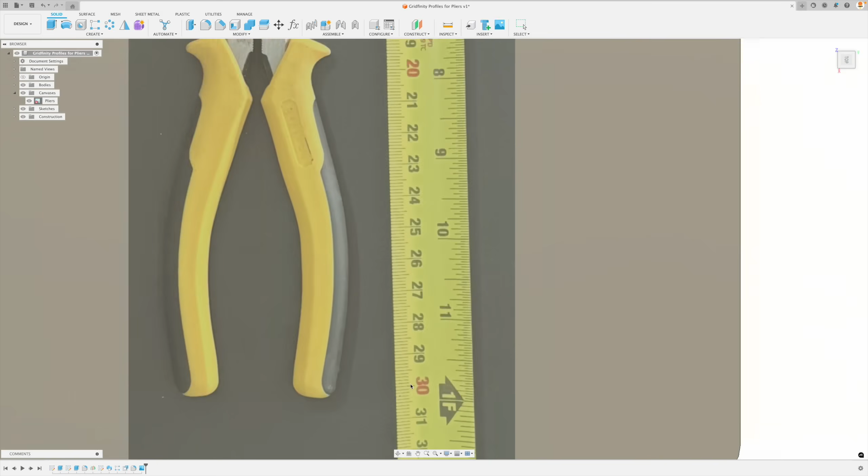In this tutorial, you will import the Gridfinity profile that we just created and use it to create a custom holder for a pair of pliers. To do this, you will import, orient, and scale a canvas image, sketch the profile using splines, and then extrude to finish it off.

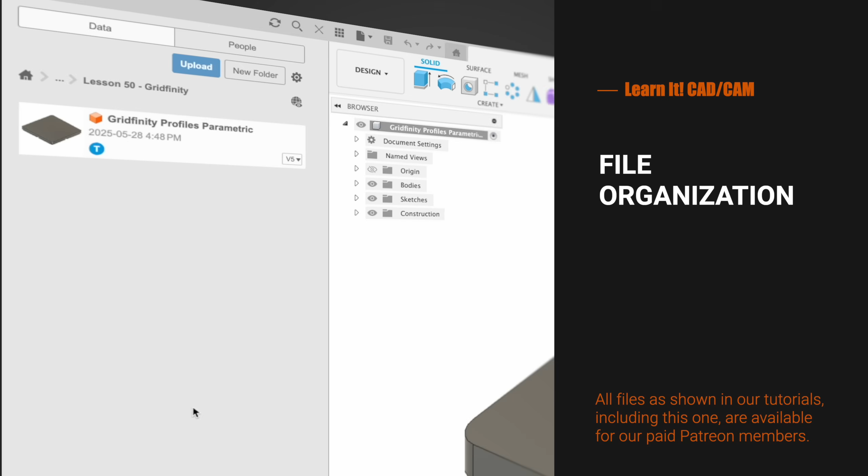The first thing we're going to do is organize some things. You can see that our Gridfinity profile's parametric design file is already inputted. This is the master file, so we don't want to use this directly; we want to create other files based off of it. So we'll just copy it, paste it in the exact same location, then right click and rename it as our plier design.

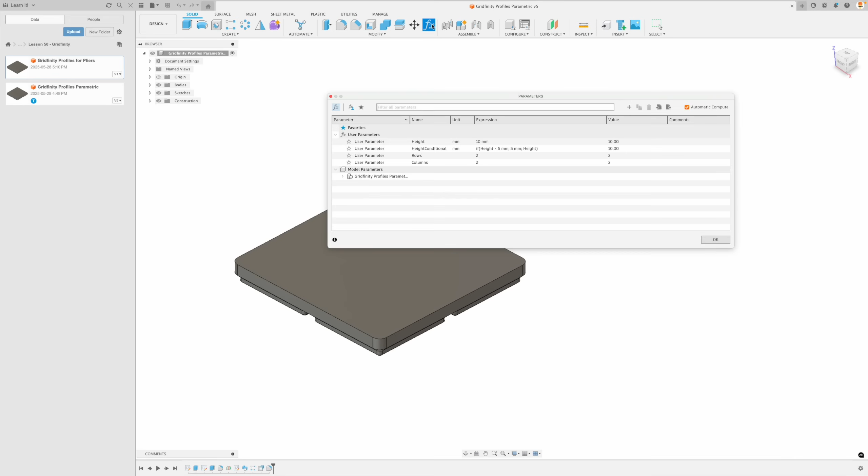Our original file is up on the screen right now, and just to show you, we can change the number of rows and we can change the number of columns very easily. If you'd like to learn how to make this, you can head over to the tutorial we just produced, and for our Patreon members, you can download this file for free.

So let's just go OK. We can hide this file and make sure to bring up our pliers file instead. Now what we're going to do is import a canvas image.

We're going to have a bunch of different custom designs for each tool in our toolbox, so I'd like to create a new folder to host all of our canvas images. I'll just call it our canvas images folder, and then within that, we're going to go to our file and upload the pliers image.

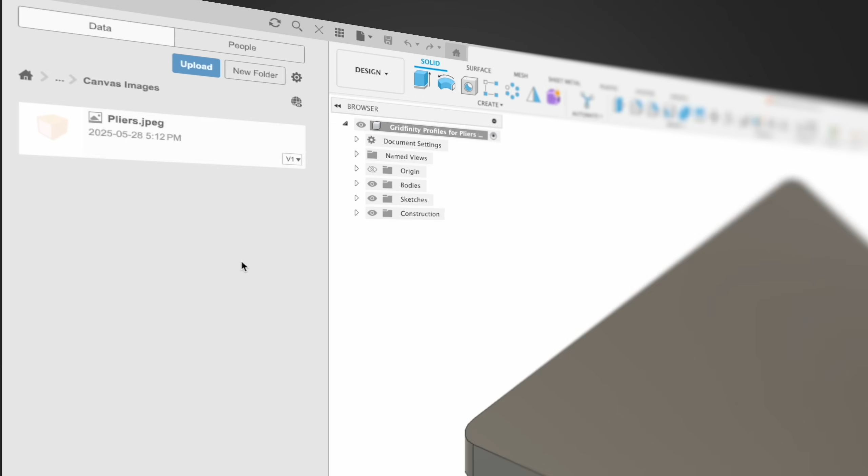This can be anything that you've taken a picture of. Once the file is uploaded, there we see it in our canvas images folder. Now we can go insert canvas, and it should find that file right away.

This file can be found on our Patreon page. It selects the image, and now our face we have to select, and there we go. Now it automatically adjusts it to the size of our face, which is good and not so good.

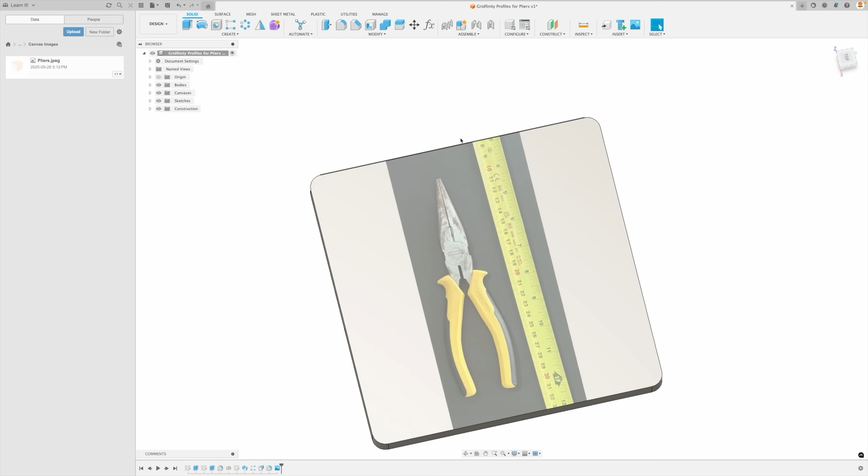We actually have to adjust the scale of it, so let's just spin it around to 90 degrees. Now what we can do is hide our data panel, click on our top face to orient everything, and let's expand canvases, right click on pliers, and go calibrate.

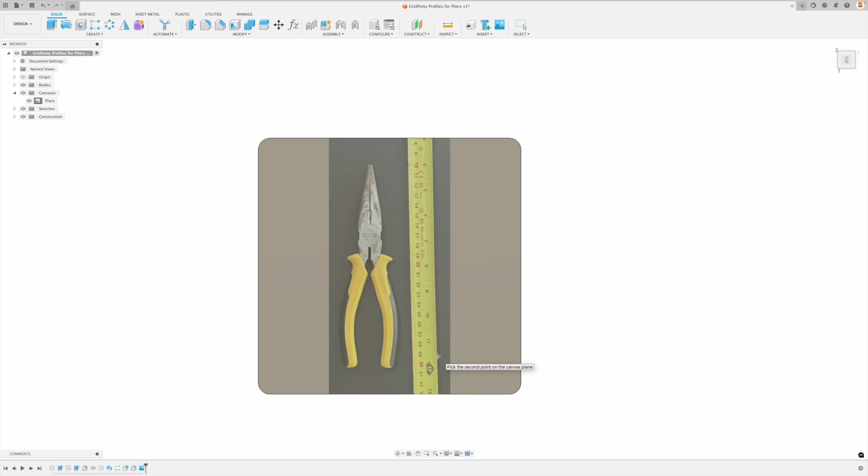Here is a suggestion: as we're taking photos of our tools, try to bring your camera as far back as possible while retaining a good resolution of the image and the measuring tape. The farther the distance away, the less distortion with perspective will show up. You can see here that the 8, 9, 10 inches section is nice and straight, but as it goes off to the side, there is some distortion with perspective.

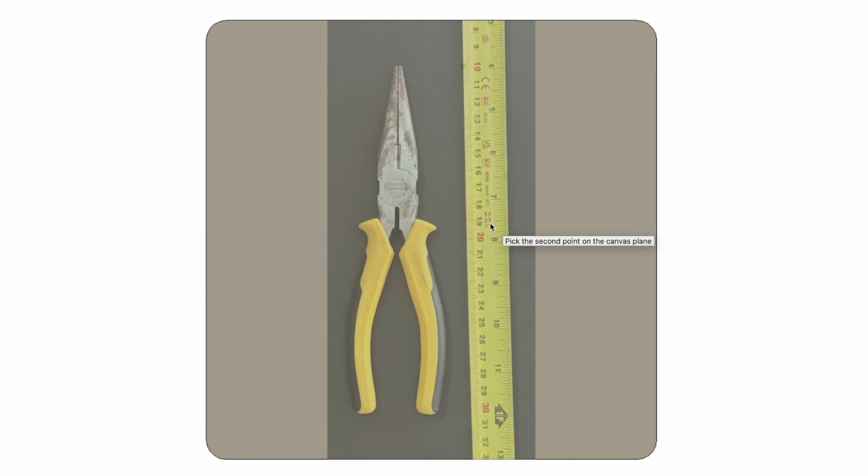Over here as well, we're getting an angle going the opposite direction from the top, and that's due to distortion because of our perspective. However, if you bring the camera very far away with a good camera and then zoom in, it will dramatically reduce the amount of distortion in the perspective.

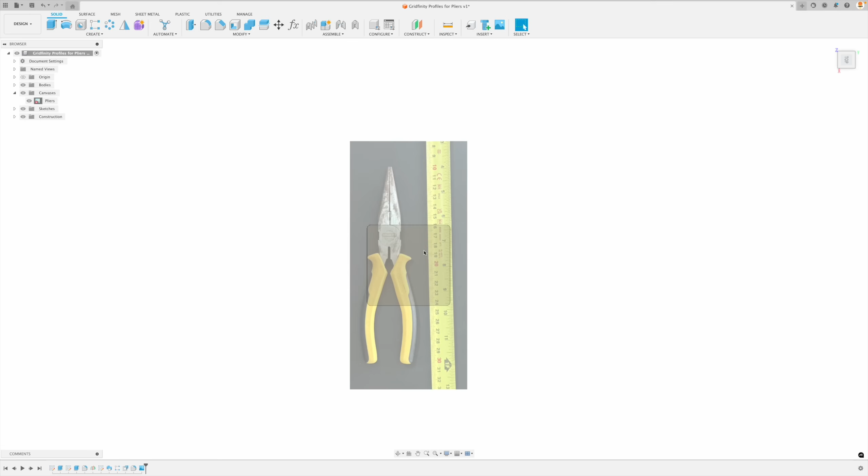But anyways, now we've gone to calibrate. I'm going to pick 10 and 30, and this is 200 millimeters right there. So you can see that our Gridfinity grid system right here is nowhere big enough for our pliers.

Now we could go back to pliers and go edit, and we can move this. We can see that the width of it is fine, but the length of it is not, so let's just put it right there. We can go OK, and now we need to add some more columns to our design.

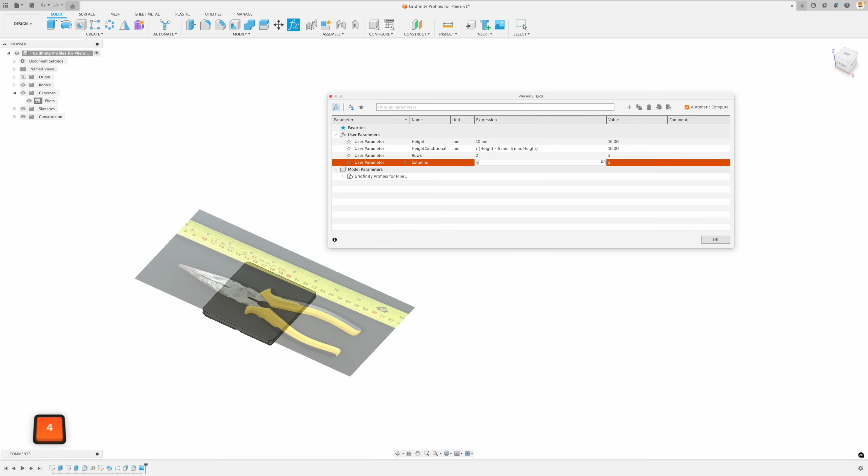So let's go over here and call it 4 columns. What do you think? That's not quite enough. Let's go 5, and I think that's going to do it. So once we're satisfied with that, we can go back to our pliers.

We can go to edit, and drag this using the little square drag handle, putting it right in the position that we'd like. Perfect, right there.

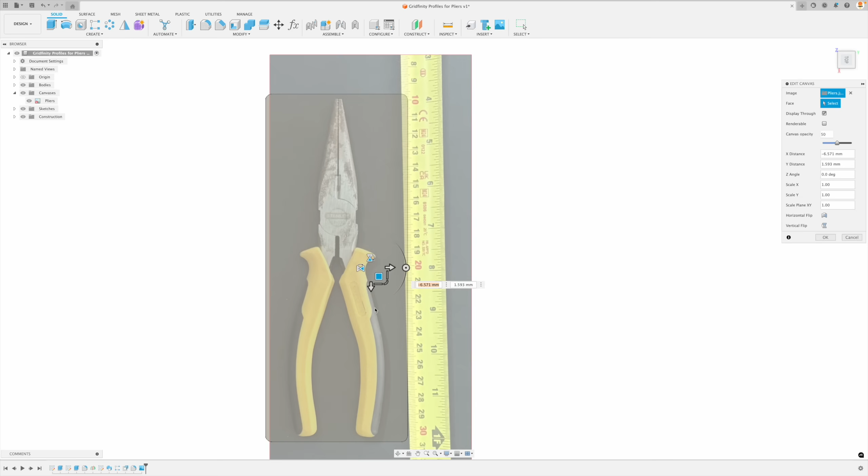Here's another tip as well. You can see I've made a bit of a mistake with the canvas image. We've got a black background, and the black part of the handles on this side is fine, but the other side is a little hard to see. So you definitely want to use a contrasting background to the colors of whatever tool you're going to use.

Now at this point, it's just a matter of sketching around our object. So we can create a sketch. Let's pick that face of our part, and here we go, we can start sketching around it.

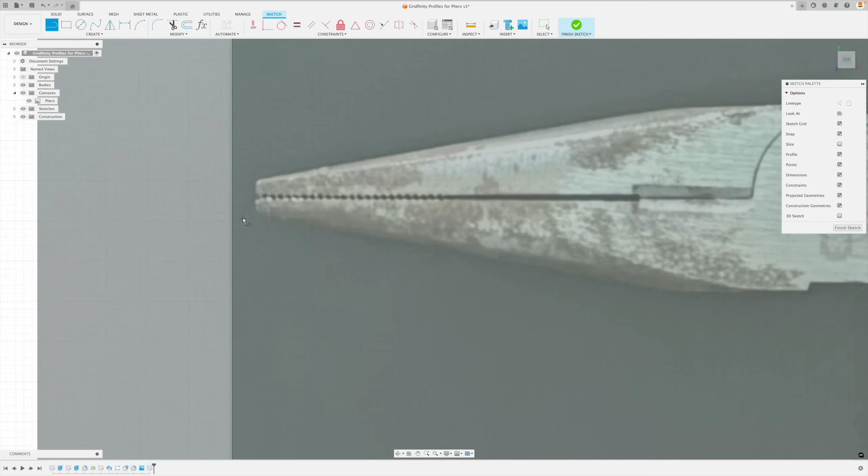Now we can use a combination of the spline tool, straight lines, arcs, or whatever we want. Here I'm going to just create a few straight lines. If you don't want it to snap to the grid, hold down Command on Mac or Control on Windows, and then it won't snap to any point on the grid system. It's a little bit easier.

I'm going to use my imagination here and not go into this little dip. I'm just going to move it on over, and that will save some time. There we go, those are our straight lines.

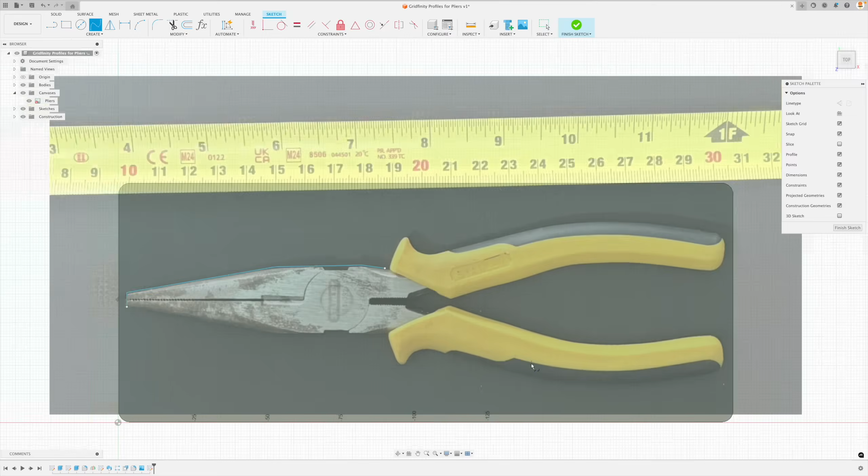Now I'm also going to use the spline tool to finish off the rest of our handle. The secret with splines is we don't want to use a crazy amount of points. We just use them whenever the arcs start changing direction. So here we go, something like that. Look at how few points I used on my spline, and there we have it, just like that.

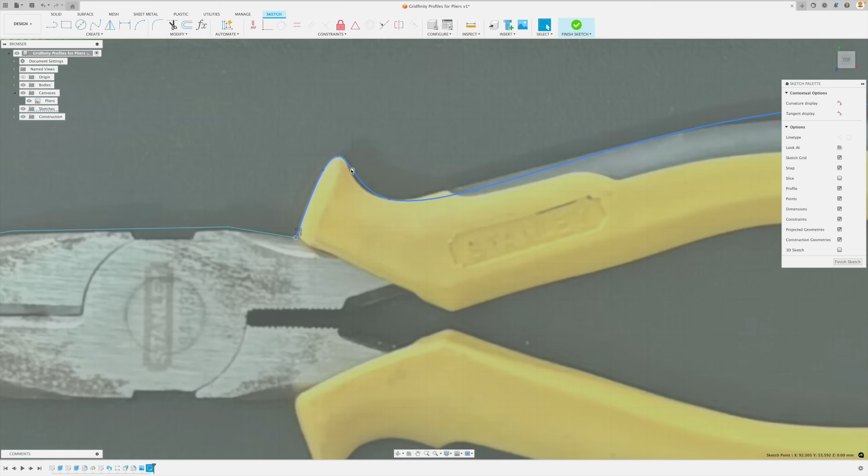Now we can grab the end points here, and any point on our spline, and manipulate it. As soon as we click on the spline, we get these control handles, and I can move them up and down, and you can see it has an influence on the entire spline. So make sure you adjust this. You can bring it out or bring it in as well to change the size of the spline.

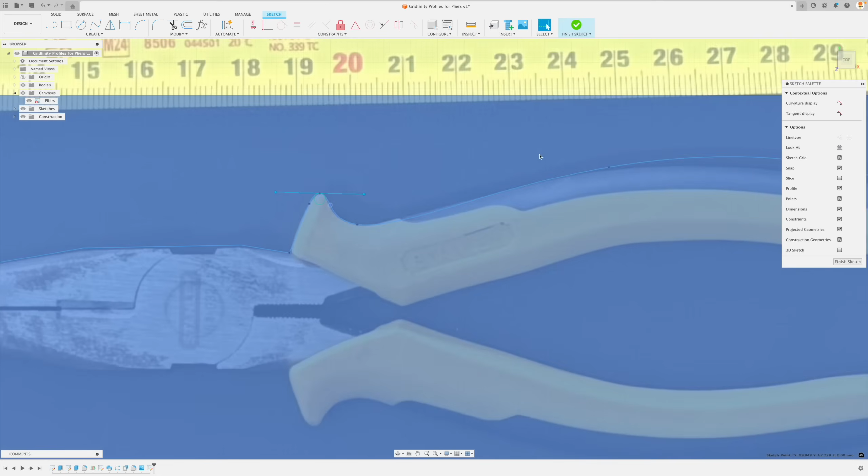I'm just going to slowly adjust all of this so it conforms to the shape of the part. We can also go over here and do this last one as well. Something like that—beautiful, everything's coming together very well. You don't have to think too much about splines. Everyone worries about splines a lot, but they're quite easy to work with.

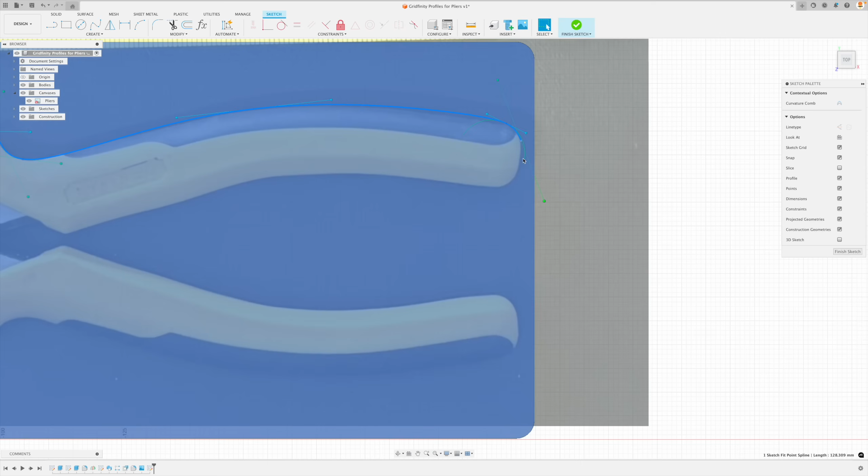So there we go, something like that, and we're going to put a little bit of an offset to this line as well, so don't worry about it too much. Now, instead of drawing all the way around the handles completely, I'd like to just cut across over here. That will make it easy to pick up the pliers with my fingers, either from the inside here, but also create some circles on the other side, which will make it easier to pick up the nose if I wanted to.

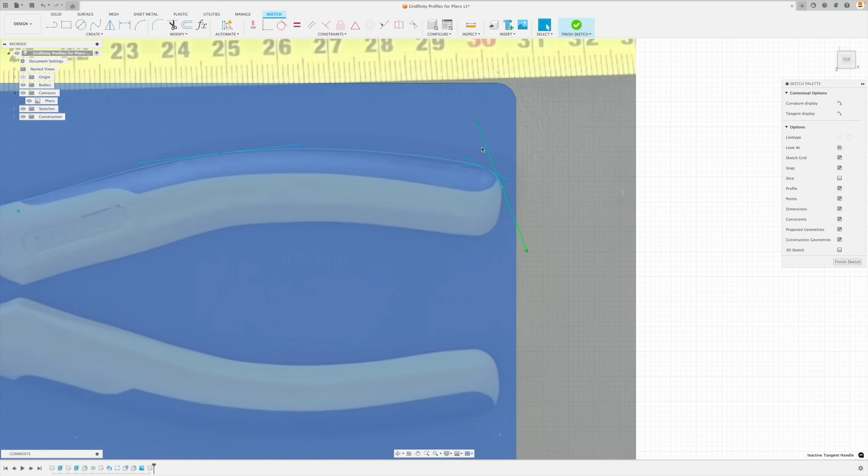But in order to make this part of the spline perfectly tangent to a line, I'm going to click on the spline first, and you can see the control rod comes up. Then select the control rod and hit vertical, and there we have it. Now this part of the spline—I can pick the spline again to pick the control rod—there we go. That way it will make sure it goes perfectly in line with a line that I now create, so I can go from there all the way to the next point that this will start.

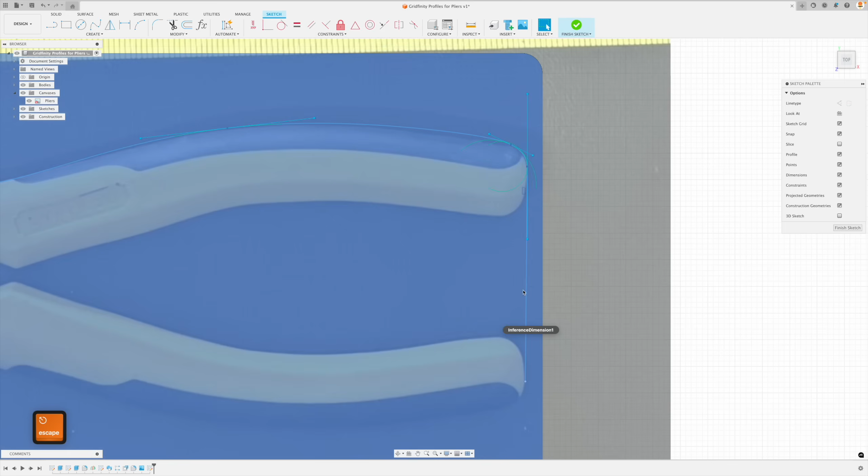Something like that, and I'd like to make this line vertical as well. So do something like that. This is looking perfect. And now I can go back to the spline and do the same thing for the rest.

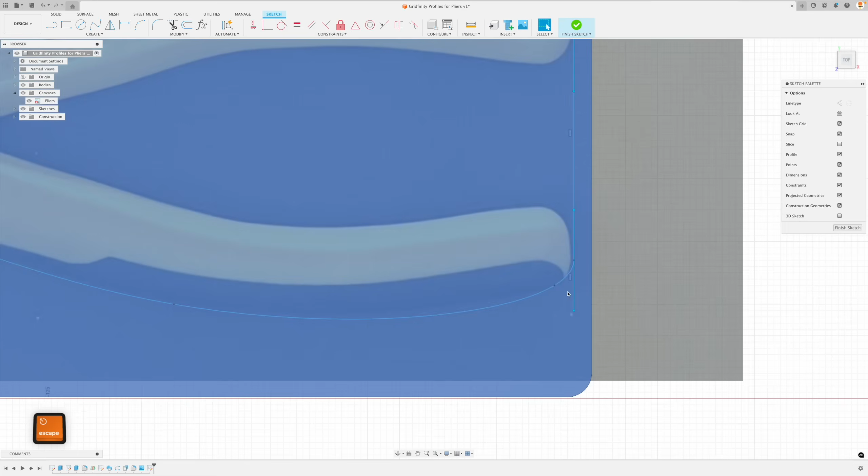Make sure to hit the check mark when you're done with your spline. Now let's do the same thing. Let's pick this control handle and go vertical. And we can slowly adjust these rods again in order to conform to the overall shape of our handle.

You can see that I utilize the command button a lot. I'm on a Mac, and that makes it so that it doesn't snap to the grid. Again, makes my life a lot easier when I'm designing this and adjusting these spline control handles.

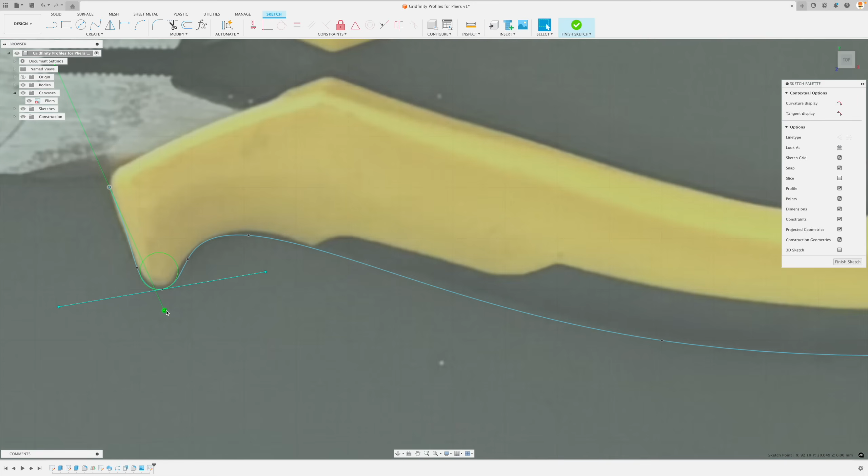Something like that. Beautiful. Now let's go back to our line and finish this off. Okay, so there we go.

Now I'd also like to include some circles right here. So I'm going to make these two points perfectly vertical to each other. So let's go there and there. And now I can add circles right on these endpoints.

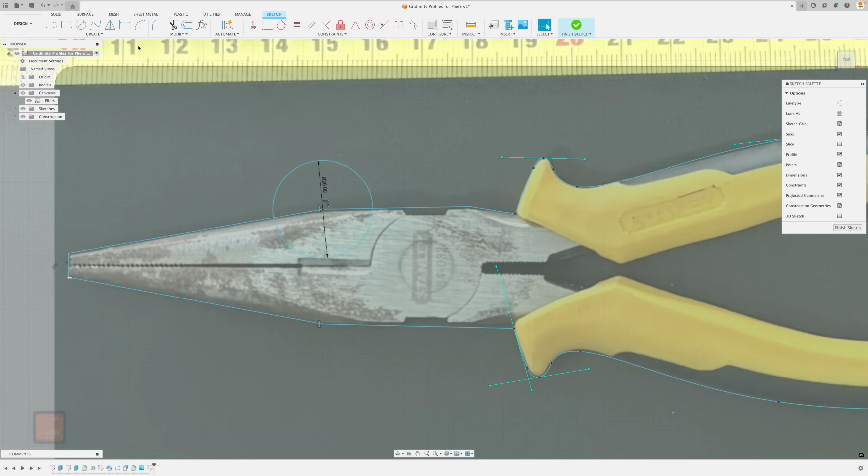I'm going to say that this is 20 millimeters right there, and same thing on this side. I don't have to specify 20, I can just go equal with our constraints. Equal and equal. Perfect. And I can also trim all of this if I wanted, making it a little bit easier to work with. There we go.

Once we're satisfied with that, we can go finish sketch and hide our canvas.

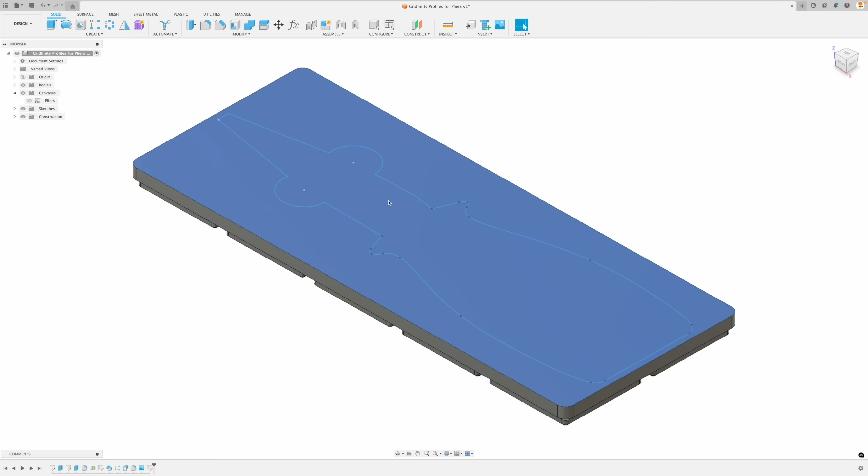Now I made a mistake on purpose. You can see as I hover over this face, it is all one closed profile, and we want this to be a separate closed profile than that. And the problem is, sometimes if this happens, we have to go right back into our sketch and look really carefully, where is the problem?

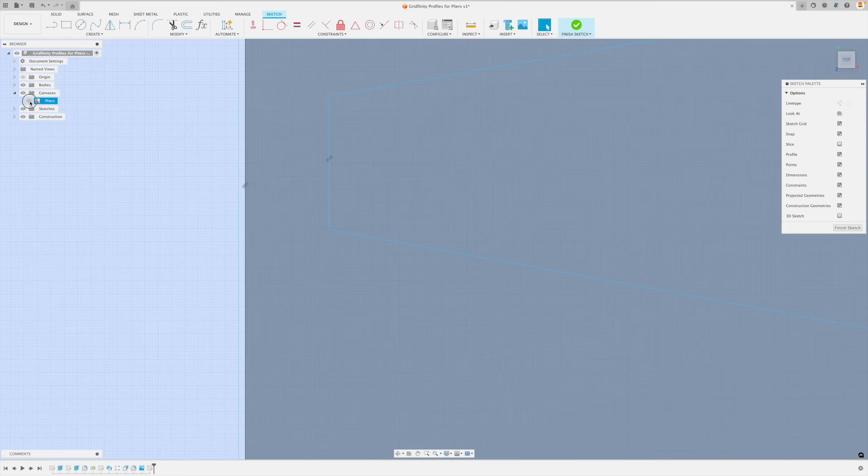And I see it right here. These two points are not connected. So in order to connect them, let's go coincident, connect that to that. And now the line kind of moved in a little bit. So make sure to turn on the pliers and pull that line back. There we go. We want to make sure that nothing adjusted too much with our sketch.

So we can hide the pliers right now. And now you can see we have a closed profile on the outside and a closed profile on the inside. So that looks great.

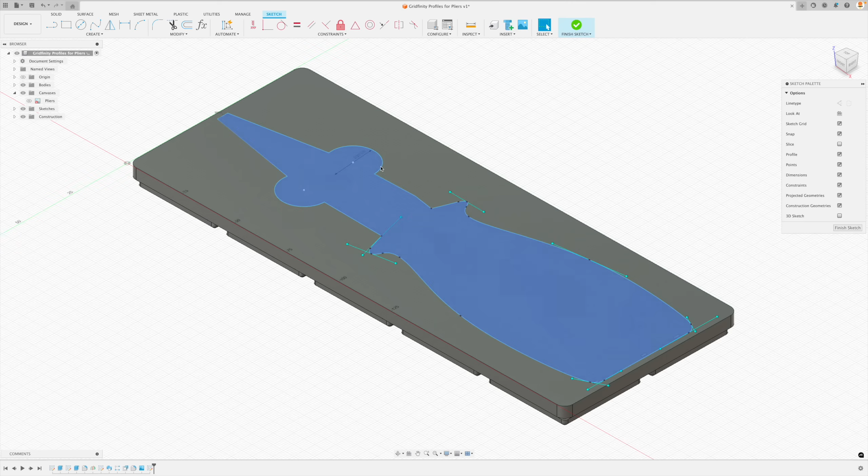Now, before we finish the sketch, we want to create an offset with all these profiles. So what I'm going to do is select all of these different lines and splines that I created. But the easiest way to do that is double click. There, it selected this entire chain, which makes our life very easy.

Now let's go to offset and we can just move this on. Let's move it out maybe 1.5 millimeters.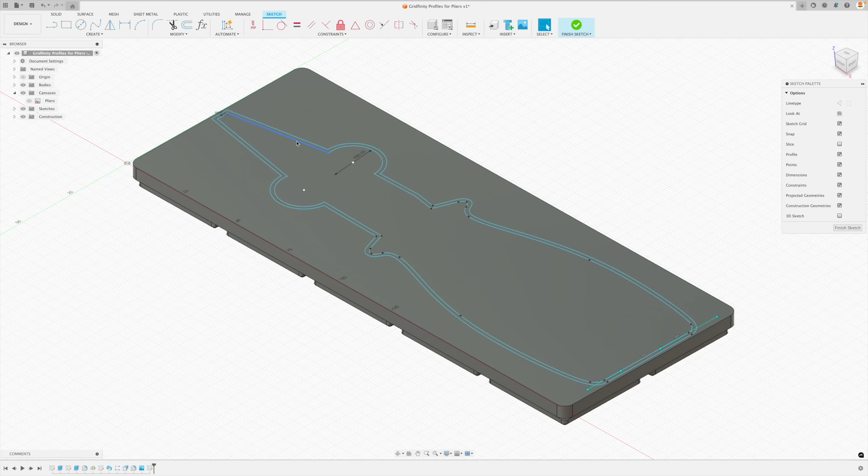There we go. And then I also want to change this inside profile, our original profile, to a construction line type, because right now we've got an outside closed profile, a mid closed profile, and an inner. I could just extrude whatever I want, but to make life easier, I'm just going to double click that, turn it into a construction line type. And now we have only two types of closed profile.

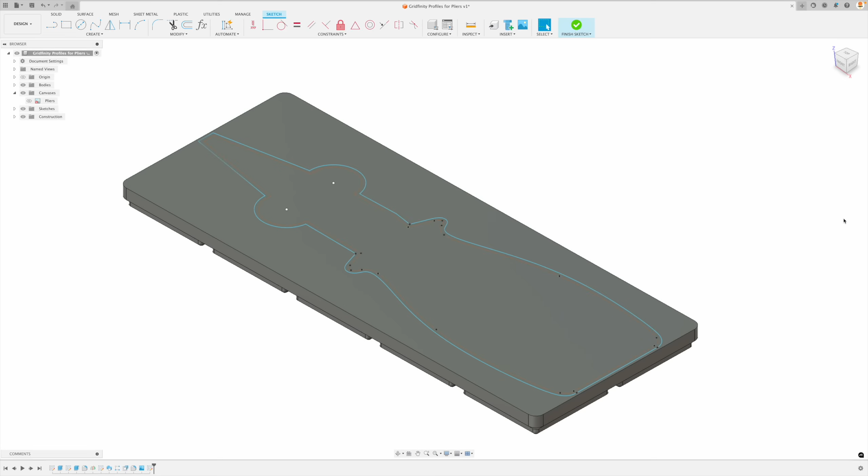So let's go finish sketch right there. And now we can go extrude, and we can drive this on up however high we need to go.

I'm going to say 15 millimeters. That's approximately the height of the pair of pliers that I have.

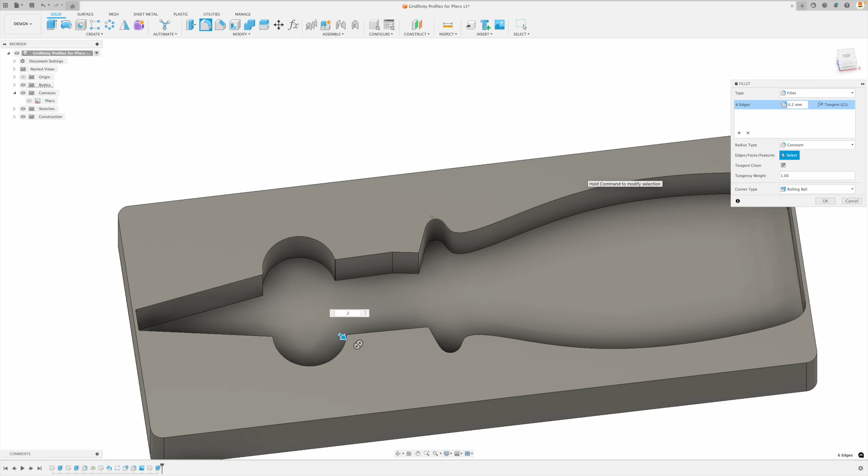And to finish it off, I can put some fillets on the sharp corners. And again, I'm going to be printing this with a 3D printer, and that has a nozzle diameter of 0.4. So if I go to 0.2, that should make it look more realistic. And I can just add some right there as well. So this is looking great.

I think we're all done.